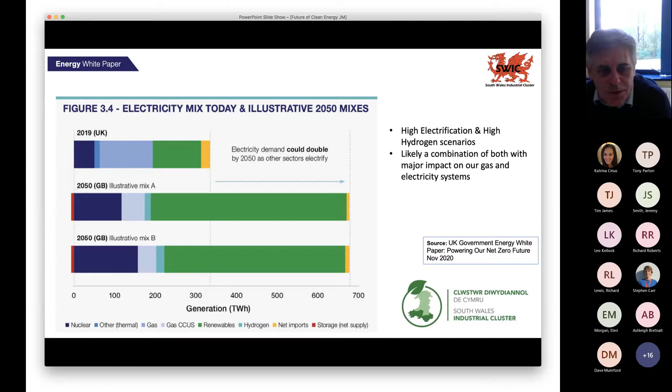And that, of course, may well come alongside the development of hydrogen, as well as a main decarbonisation vector for our industry. And my view, and again, this may not be shared by all, but certainly it's likely that a combination of both is going to occur. So much more renewable electricity alongside hydrogen. So what's clear is that there's going to be a significant impact on both our gas and electricity systems as we move towards this decarbonised system.

This is drawn from the same energy white paper, just as an overview, and it shows the transition from an electricity system of the past, where we had relatively few but large and predictable and controllable power plants, moving towards the idea of much smaller sources but less predictability and variability with whatever renewable source that may be. An electricity network that was based on a large grid, whereas we're moving towards something that's a little bit more smart and digitally enabled.

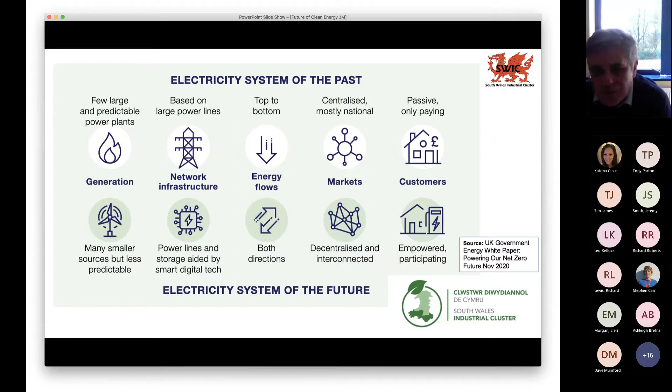More complexity in terms of energy flows, a transition towards a decentralized and a more interconnected market system, and indeed, at least from the domestic basis, but also potentially from the industrial basis, not just customers in that sense, but potentially two-way flow where a customer may well also be a supplier at certain parts of the day. So a more complex electrical system we're moving towards.

I've drawn this from the Committee on Climate Change pathway requirements, and just to dissect this a little bit - you can see how they're suggesting that to meet our carbon goals, our electricity demand is going to increase and continue to increase to the middle of the century, and significantly between 2035 to 2050, suggesting widespread electrification. And clearly with that, there's a significant increase in the potential for flexible demand, and hydrogen may well be part of that activity.

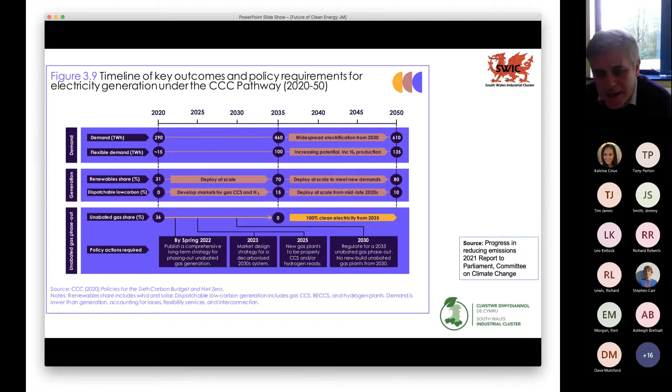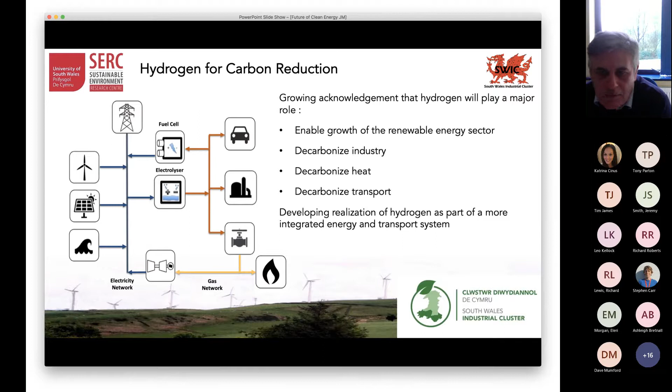So, from my perspective, I'm going to talk about hydrogen briefly. I think there's clear acknowledgement that hydrogen is going to play a major role in our decarbonisation, and it's going to enable growth of the renewable energy sector. It's going to help to decarbonise industry, heat and transport. And there's a realisation that hydrogen is part of a more integrated energy and transport system, as I said at the outset.

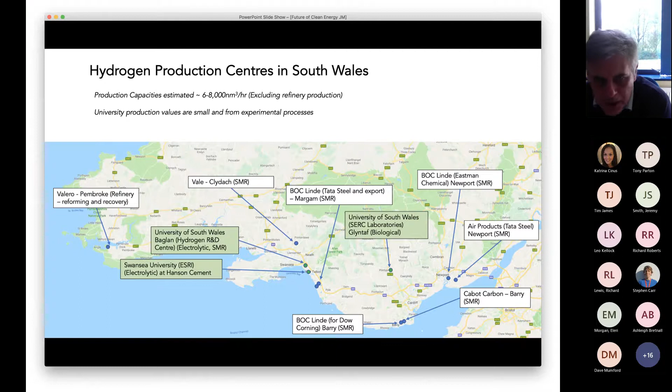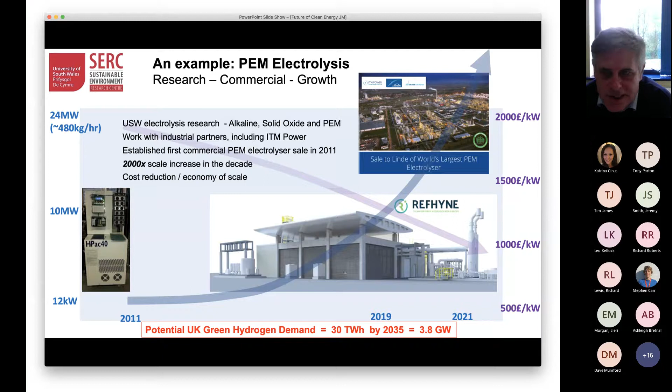So with that, significant reductions in capital cost. Capital is not everything in that respect, but I use this to illustrate that in a relatively short space of time, there's been significant growth in the sector and maturing of the sector, from an early stage R&D to a more robust commercial offering.

What that means for Wales as an industrial, and particularly South Wales an industrial-based economy, I would argue that we should have far more than our fair share of that, or certainly a significant share of that activity.

One of the challenges we face, and others will have mentioned this if you were listening this morning, is the absence of suitable proven geological storage for both CO2 and hydrogen in this line south of the Mersey and the Humber. And it's more difficult - so unless we can, and there may be potential opportunities in St George's Channel, it's not clear at this stage.

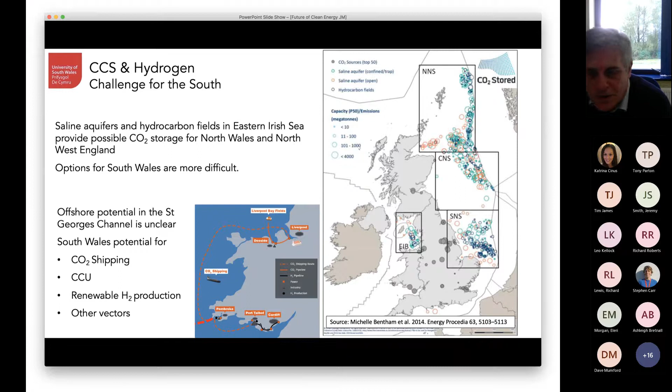So my hope was to give you an overview of the clean energy position. I've gone down a few avenues, and I'm sure the subject is much wider than that. What I'd like to do is pass over to Tim now from Port of Milford Haven, and I'll give up control of the screen. Hopefully, Tim, if you're ready, you can take that over.

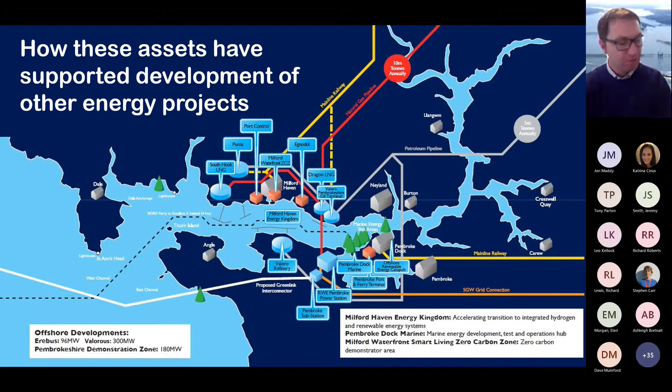This foundation has really given us an opportunity to create proposals and infrastructure developments to support the needs of the evolving energy requirements of us as an infrastructure provider. One of them is Pembroke Marine, based in the existing curtilage of the dockyard, and the idea behind that has really been to create a centre of excellence for marine energy and engineering.

The picture you can see here is Bombora, an Australian inward investor who came in 2016-17 and established themselves in Pembroke Port. This is one of their M-Wave modules being taken from one supply chain partner to another, and it will be constructed in Pembroke Dock and then trialled in the Milford Haven waterway.

There is quite a significant resource and opportunity for the wave energy sector. There are some challenges as well, so we've got to be aware of all of that when we're thinking about our infrastructure proposals. But it's a great project, a collaborative project, and something that we're really proud of, that is starting to deliver on the ground and create the type of benefit that we want.

I don't think you can go anywhere without seeing floating wind being mentioned in terms of future energy. Here you've got the Hexicon device, which they're going to be deploying in WaveHub. On the previous slide, you saw a couple of the Blue Gem wind developments being mentioned. In addition to that, since that slide was created, there's another three 100 megawatt demonstration projects, and there's significant interest in scaling up for floating offshore wind in the Celtic Sea.

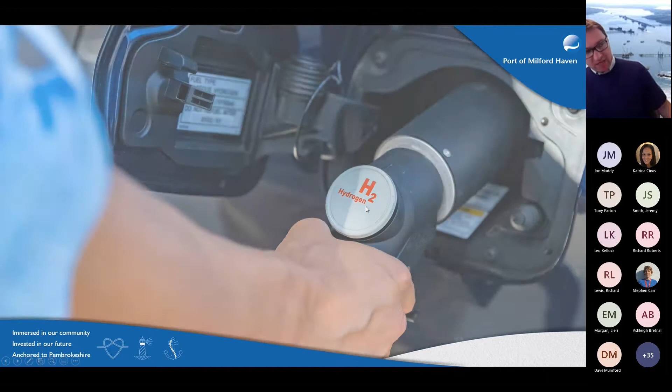And obviously, as Milford Haven port and as a wider industrial cluster, there's going to be massive opportunities to support that type of activity and that energy that's created, helping us to decarbonize our industry and our economy. And as Jon mentioned as well, hydrogen - we're seeing an increased level of interest in hydrogen.

To try and help progress that, one of the projects that we're working on is the Milford Haven Energy Kingdom project. I won't speak too much about it, but it's not necessarily a technology play. We know we can electrolyse, we know we can put it in a car and drive a hydrogen powered car, we know we can store it, we know we can pass it in a fuel cell to create baseload.

But what we need to understand, and what we need to help key decision makers understand, is what market mechanisms need to be in place to unlock the use of hydrogen at a local level for use in our heat, power and transport systems. And that's really what the Energy Kingdom project is about - it's a market mechanism play.

And although it's focused on a local level, we're completely aware that the big opportunity is those big industrial players that are ingrained in the Milford Haven waterway, the likes of RWE, Valero, and Dragon, and what market conditions they will need in order to really ramp up their use of hydrogen, whether it's green or blue, as a transitionary technology.

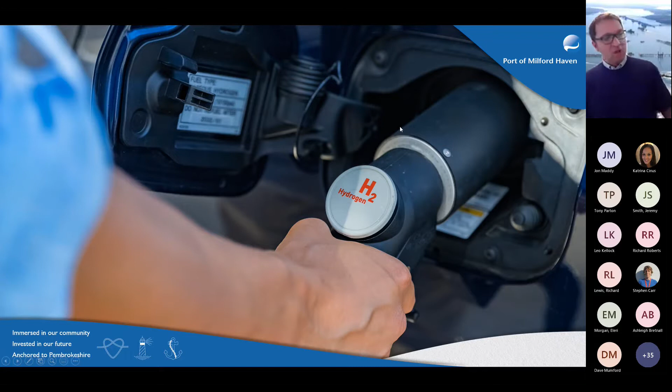So I think that's kind of where we see it going in terms of the technology. And I think the question and the challenge that we've got is how do we, as Milford Haven Port Authority and as South Wales Industrial Cluster, maximise the opportunity - not just in terms of the adoption of the technology, but how do we set ourselves up to create those long-term job opportunities for our young people?

There's ability for our supply chain to get involved in those industries and win business and create the kind of economic growth that government wants to see in terms of levelling up and building back better and all those good things that are in the 10-point plan. For us as a port -

We're not the biggest organisation, and we've got limited resource, so we have to collaborate. And that's the great thing about the South Wales Industrial Cluster - we get to collaborate with like-minded people, and we can use the roadmap project to help understand what's coming and when it's coming, so that we can deploy our resources as effectively as possible.

The same with the deployment project, which is a little bit more blue hydrogen focused. We get to use involvement in that project as an opportunity to understand the environmental and navigational impacts that blue hydrogen and carbon capture and storage shipping will have on the waterway, and how we need to prepare as a statutory body to respond to that and prepare for that.

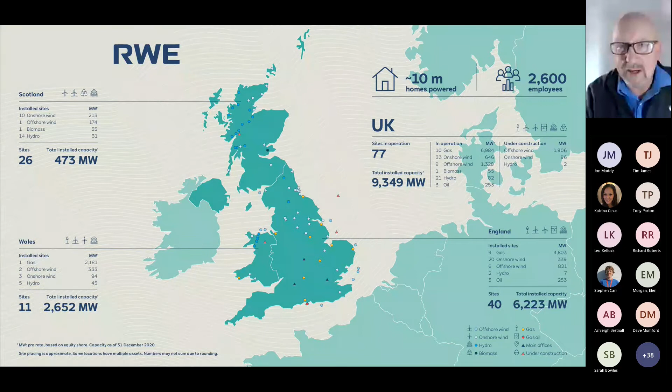This is a slide that shows our activity in the UK. So what you've got there are different coloured dots for different types of infrastructure, be it offshore wind farms, offices, onshore wind farms, hydro businesses, biomass plants, and gas-fired power stations. And you see the Pembroke one there. It gives you a flavour of our spread across the UK and the amount of activity we're involved with. In Wales, our total installed capacity is 2.6 gigawatts, largely the gas-fired power station at Pembroke, but also offshore wind, onshore wind and hydro. We are Wales's largest power generator and operator of renewables, but also power.

Talk a little bit about hydrogen, and I'm conscious there's a little block here. I don't know if I can just remove that. Right, that's gone, hopefully you can still hear me.

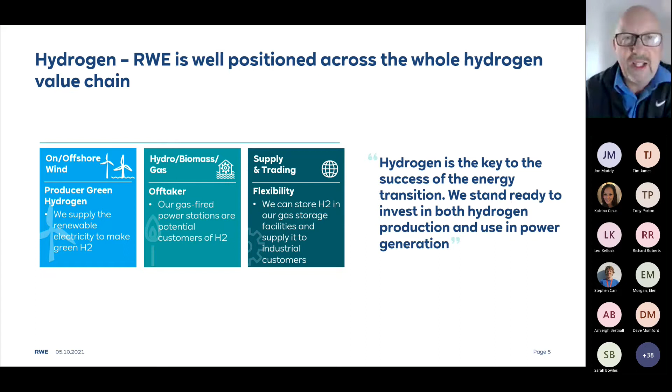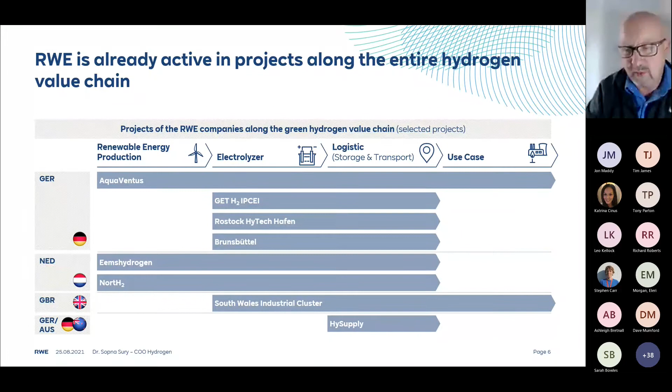We've got a target internally of approximately 2 gigawatts of hydrogen production by 2030. Just to give you an idea, we've got a portfolio of projects across the world, and many of those aren't in the UK, but they do span across the value chain.

Some projects cover the electrolyzer and logistics, others will be included with renewables, some will be included with the use of hydrogen. So just to give you an example of that, what I really want to talk about today is the Pembroke Net Zero Centre. This is an umbrella term for a concept that brings together a centre of expertise at Pembroke, people within the broader company.

To deliver initiatives that decarbonise, centred around the Pembroke area. So we've got the conventional power station, we've got floating offshore wind, we've got an electrolyzer, and those are really the three themes of it. What we have is the Pembroke Net Zero Centre is the UK's transition to net zero writ small. It's what we've got to do right across the UK, we can do in one place in Pembroke, and that's why we chose that site and that name.

So we've got three pillars of activity, really. There's the decarbonisation of the power station itself. There's the offshore floating wind opportunity in the Celtic Sea, and there's a green hydrogen production project.

Excuse me a minute, my dog's just raided the bedroom. Out. Sorry about that. That was my dog, she just raided the bedroom and jumped on the bed.

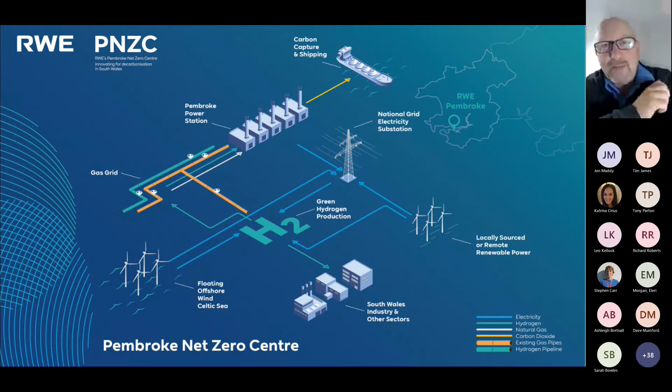Everyone likes an infographic, and I would be remiss if I didn't have one as well. So what this tries to do is set out in a way that captures the big picture interlinkages between all the various activities of Pembroke Net Zero Centre.

So you've got everything from locally sourced direct connected renewables that could be linked to an electrolyzer that could then export to local off-takers, the power station, into the gas grid. You've got the opportunity later on of floating offshore wind, potentially either connecting directly to the national grid electricity system or potentially creating hydrogen and putting that hydrogen into the grid infrastructure system.

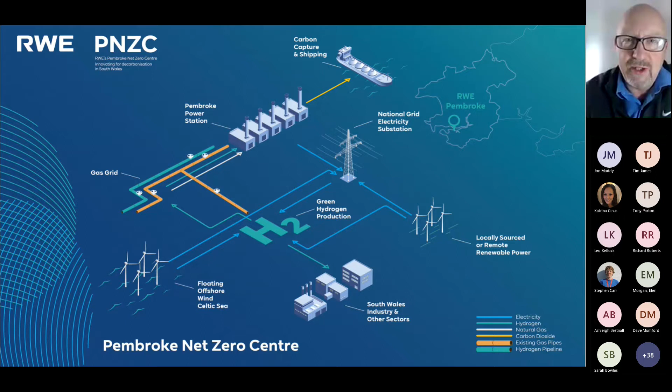You've got the potential for Pembroke Power Station being decarbonised and the shipping of carbon dioxide to storage elsewhere in the world. So this tells the story of everything that could happen. It's not to say it necessarily will all happen, but the idea is that's what we're working on, and as much of it as can be done will be done, I think.

Why Pembroke? This is really about why is Pembroke a good location for this kind of centre and this activity? And I've mentioned some of it, but effectively we've got a gas-fired power station that needs to be decarbonised.

There's the opportunity for the Celtic Sea offshore wind right on our doorstep there. There's a number of decarbonisation projects for the South Wales industrial cluster who could be users of hydrogen. We've got work on Milford Haven Energy Kingdom that's relevant. We've got potential suppliers of blue hydrogen in the vicinity. There's deep water port, which may be useful for moving CO2 or for shipping hydrogen about. We've got power grid, we've got the gas grid, and both of those are on site. We've got, as I say, potential off-takers for green hydrogen as well.

Then I mentioned we had three pillars to this activity. The first one is firm, flexible, low carbon power. This is effectively decarbonising the 2.2 gigawatt power station at Pembroke, which is a gas-fired power station. It's one of the UK's most efficient gas-fired power plants, and it's got the lowest level of CO2 production per unit of electricity.

But I think the challenge is it needs to be a net zero power station in due course. And I think you've probably seen the announcements that Boris Johnson is soon to make around taking gas out of the power system by 2035. So clearly that is a pressing issue, and it's something we're going to have to get to grips with.

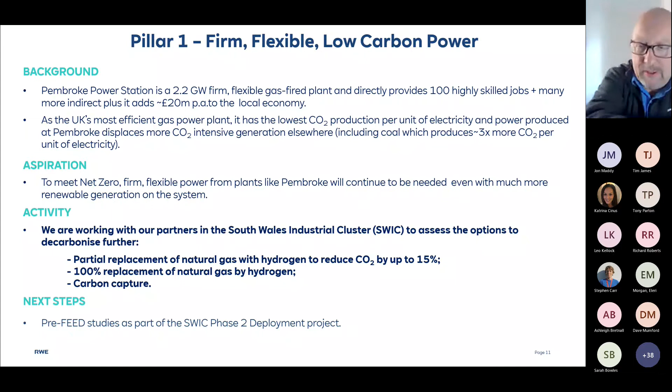In terms of pillar 2, this is the Celtic Sea floating wind. So basically us, alongside a large number of other developers, see the opportunity for floating wind. It's clearly something that is going to need to ramp up, as the opportunities for fixed bottom offshore wind are increasingly taken up and already developed. Then you're going to need to move to floating to replace that fixed bottom offshore wind that you've effectively run out of space for. There's only so many good places around the coast of the UK to do it.

The Celtic Sea has been identified as one of those. I was at the launch of the Celtic Sea cluster last week, and it was very interesting. I think there was talk of maybe up to 100 gigawatts or so of floating opportunity within the Celtic Sea, and talk of about 10 gigawatts or so within Welsh waters off the coast of Wales, which is great. Now that is a real opportunity locally, because it is off the shores of Pembrokeshire, and having the grid on site is obviously an opportunity for us, and we're a floating developer, so we're interested in that, as are any number of other people.

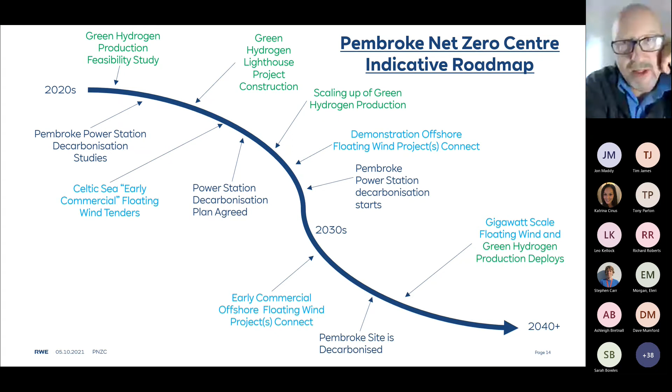That is it for my presentation.

Fantastic, thank you, thank you Jeremy. I'll stop, I'll turn this down now. Right, thank you, sterling effort coming from your COVID sickbed, so thank you for that. Yeah, sorry about the interruption from the dog.

So yeah, Lightsource BP, we've been involved with SWIC now for a while. We are obviously a solar power developer, so that's the expertise that we're bringing hopefully to it, and that's the kind of area that we deal with.

A bit about Lightsource: we started back in going on 2013, 2012, perhaps, about 10 plus years actually. I only joined in 2015, so I think about 2010. We did a joint venture with BP a few years ago, it's now a 50-50 fully joint venture. BP, some of you may be familiar with, had a fully owned solar arm back in the early 2000s. However, they were doing PV module construction, which then really kicked off in China and just killed BP's solar ambitions. So we're a leading solar power developer in about 15 countries.

Our pipeline got very large very quickly in the last year and a half. We recently announced some very large funding requirements have been hit, and we laid out a new pipeline which I think is something around 25 gigawatts by 2025 of solar power, and that's all over the place. That's United States, UK, Australia, Portugal, Brazil, Italy, Spain, perhaps Poland as well, and some of that's working with BP as well near some of their sites, but a lot of it is just what we've been doing for the last 10 years, which is turning up to a field, getting all the planning and everything in place, and building a solar farm and exporting the power to the grid.

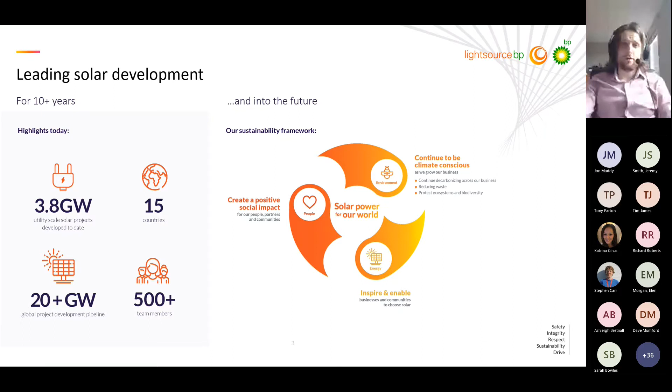So we do everything from develop the site, to managing and operating it, to owning and selling it. So we have an asset management team, an operation and maintenance team. With the developing, we've got a whole finance team that go out and get finance, because these are all done on project finance, so we'll go and get lenders for that. We have a whole in-house technical team to do what we call 70% design. So when it comes to the actual engineering, procurement and contracting, the EPC work, we don't actually do that. We don't do exactly where the cable trenches are going to go, we don't go and subcontract the trenches and stuff like that. We use an EPC, engineering, procurement and contracting company. So we do everything except for the actual physical building of the site.

And as I said, it's a global company: UK, Netherlands, we had a joint venture in Egypt, which is going okay. There is Eversource Capital in India, which is a joint venture between Lightsource and a financial institution over there to invest in solar power, and we have some smaller sites in Trinidad and Tobago. We're just getting into Taiwan at the moment, but the real big ones are in Europe, United States and Australia, especially Australia and the United States, because obviously a lot of land there. So as I mentioned previously, the structure is vertically integrated - legal, planning, finance, everything inside the company. So we do everything except for actual construction, and we own the plants.

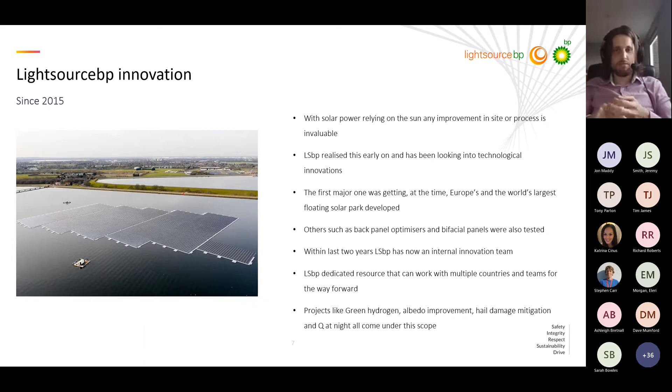Projects like green hydrogen, improving the albedo, hail damage mitigation, and creating reactive power at night come under this innovation team's scope. And because we're an innovation team within a developer, not just in a consultancy role, we have loads of sites that we can experiment on and loads of good data that we can use - good data for about half a decade, because some of the earlier data from when the sites were originally built wasn't that great in terms of coverage.

It's this good data and background that we've leveraged into SWIC, because in Wales we already have several solar power sites, and we've used the data from those sites to help model how renewable power can have a relatively smooth production output so that we can get a relatively smooth hydrogen output.

We do like to keep a lot of links to industry in the innovation team, both through our core business as a solar power developer, but also through BP. And we're always trying to make more academic links, so working with the university has been really useful on this project, including coming up and seeing the electrolyzer like we did a few weeks ago.

The area of interest for our innovation team, which SWIC and green hydrogen really falls well into, is not R&D - not very early days stuff. Something like perovskite is definitely on the horizon, but it's not something we'd work with unless we can have a couple or a few dozen units of the kit, whether it be a new kind of bifacial panel, a new kind of optimizer, or even a new kind of robotic mower like we have at the moment.

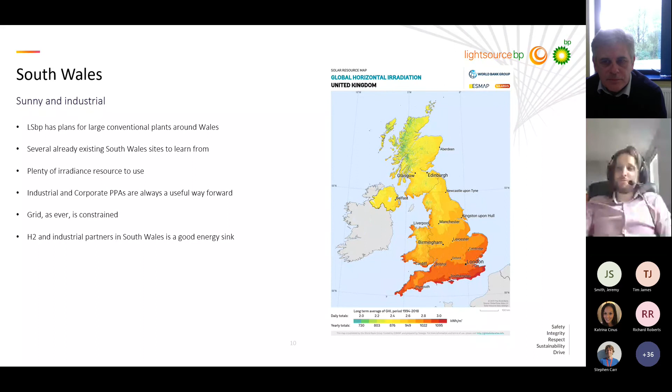Also with South Wales, there's a lot of industrial and corporate power requirements and private wire PPAs, which is where they build a site next to your site and put a wire in - always a good way to go. And grid is generally pretty constrained in South Wales because there's already a lot of power generation and a lot of power users already there. So that's our South Wales plan: as with everywhere, more solar power, more renewable energy. Thank you for listening.